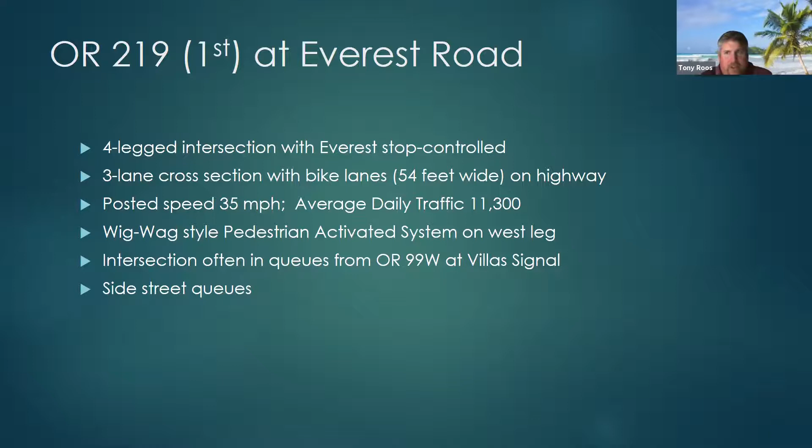I think one of the big issues I have with the intersection is the visibility of the wigwag signs. They often get hidden by all the sign clutter and utility clutter leading up to it. And you really can't see the pedestrian trying to cross there until it's really too late.

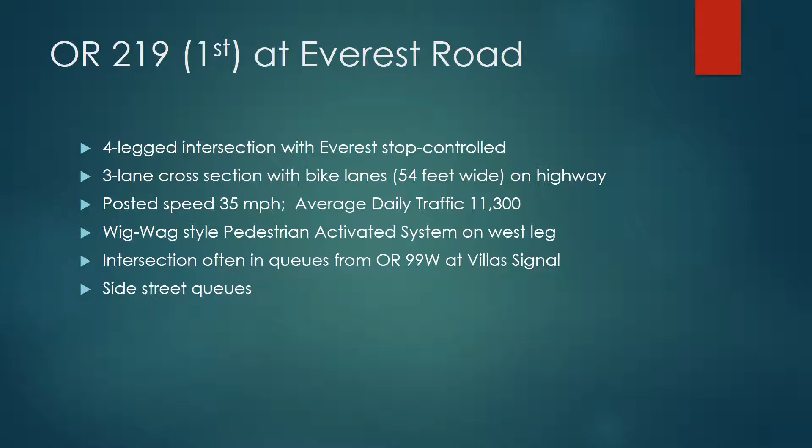Anybody else have anything to add? Okay. Hopefully that's not just a Tony issue.

So, the other thing is where you get lots of complaints about the queues here, because now that 2nd Street is cut off over here, this part of the neighborhood is complaining that they can't ever get out, even though they do have another way out over here. So it's this particular one. We've gotten a little bit of complaints about trying to get over here to the grocery outlet.

So just wanted to put this map up to where this is really the intersection I was trying to focus on per se. I'm going to dig a little bit into the crash history, just to try and figure out what is actually going on here.

So SPIS, which I don't know if you guys are familiar with, is our Safety Priority Indexing System. We run it once a year using the last 3 years worth of crash data. We rank all the segments on the state highway system, and we take a look at the top 10 to 15% to see if there's things we can do.

So this particular section, which is from mile point 20.71 to 20.82 — the 20.71 is actually just south of Villa. So it actually does take that corner where it comes down off of Villa and then through this particular intersection.

So in 2017 it was in the top 5%, meaning only 5% were worse than that. But as you can see, it's actually going down — in our most recent one, 2019, it's dropped down so it's only in the top 15% instead of the top 5.

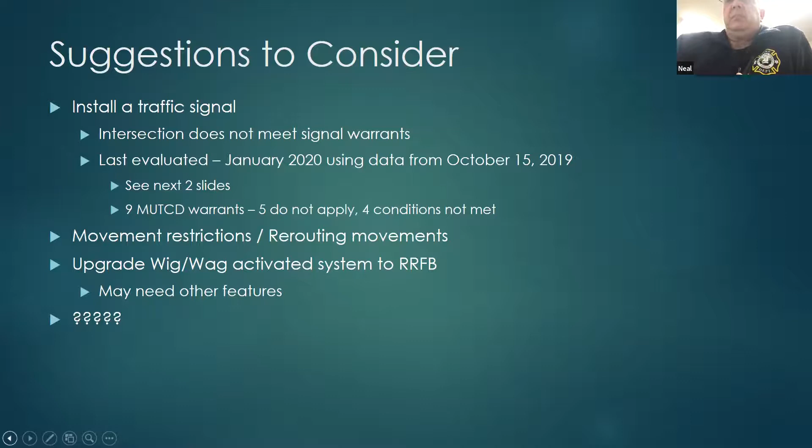We have had other requests for a crossing mid-block between 99 and Villa on 219 as well, for people to access the grocery outlet. But there appears to be a missing sidewalk gap between Villa heading, or from Everest across Villa, about 400 to 500 feet of sidewalk that's missing. Is that on the grocery outlet portion? Yeah, and if that was filled in, maybe a better crossing location would be the west side of the Villa intersection.

Well, it depends, because don't you have a lot of pedestrian traffic coming up Everest that just wants to cross Everest and keep going north? You wouldn't want them going out of direction all the way down to grocery outlet in order to come back. I don't know where they're going - if they're walking from Everest to get up to George Fox, or over to get to Ace Hardware and La Sierra, or the Mexican restaurant. Without actually following pedestrians, it's hard to say where they go, but that whole area between 219 and 99 on Everest - or if they're just trying to get to the Villa signal on the east side of the intersection to continue north on Villa, I don't know.

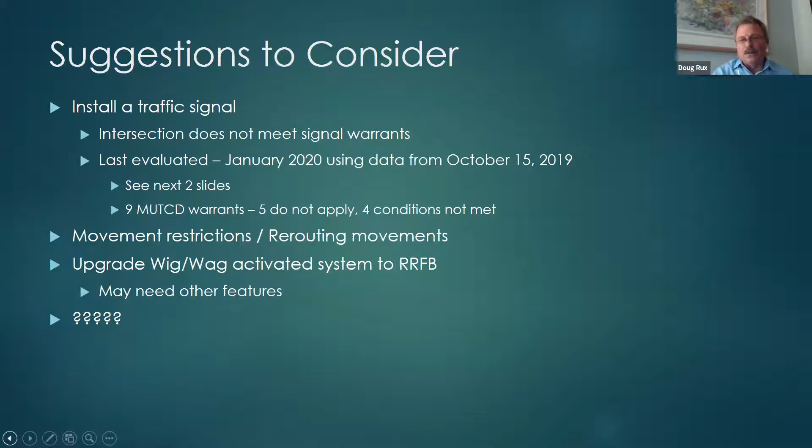So those are some things we can keep looking at, Doug, if you want. It's one of those we consistently hear from the residents who live south of 219 and off of Everest and Church and all of those areas. They're really landlocked - you get to ride out on 219 and go down to Springbrook and around, or use Everest. So we're constantly hearing from residents about safety concerns at the Everest/219 intersection and what can be done. They feel very isolated.

Well, like I said, we can have some more conversations about that, Doug, offline after this. So should we go on to the next intersection? Traffic safety - any other questions on this intersection? Seeing no hands or violent objections, let's go to the next one, Dorothy.

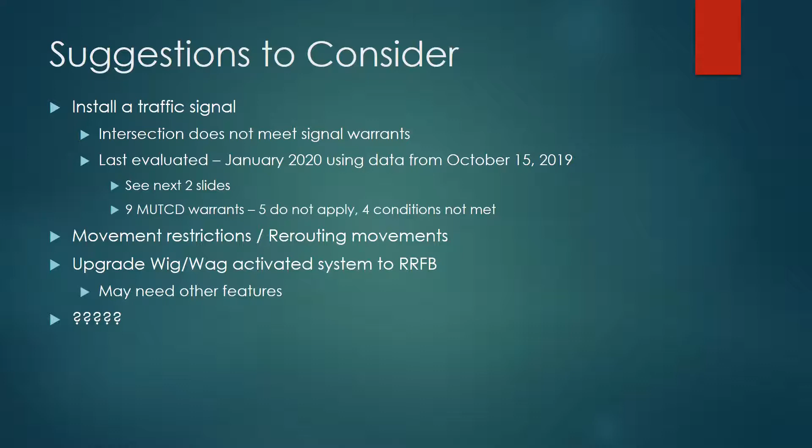That's just the three Andrews working out the audio. We all have the same invite, so they were all Andrews. Okay, got separate invites to figure that out.

Thanks. Okay, so the second intersection to talk about was 219 at Sheridan, that's College, like one block north of 99. It's the four-legged intersection, Sheridan stop controlled. It's got the part-time restriction on the west leg. So for eastbound traffic, that's done with just a sign that says right turn only from 3 to 6 p.m. Monday through Friday.

This particular part of the highway is only a 2-lane cross section. There's no parking, it's only like 24, 25 feet wide. Posted speed of 25. It's got about 7,100 cars.

This one, typically in the afternoon during peak periods, there is the queue from the signal, and it starts building the side street queues. The thing that I thought was really pretty interesting is when I looked at the crash information, 17 of the 18 crashes at Sheridan were that eastbound move.

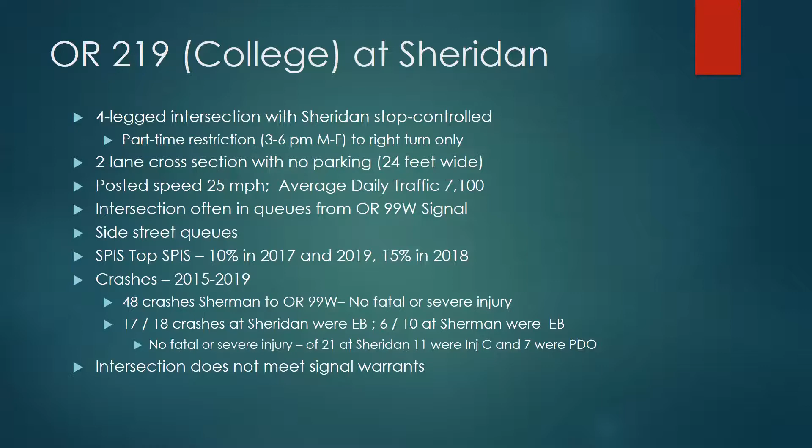The intersection doesn't meet signal warrants. The SPIS, if you take a look and see, it's been in that 10 to 15% the last 3 years. And that's just basically based on the number of crashes, not basically on the severity of the crashes.

So we are talking about this intersection right here.

One thing that I know I've talked with Karin about in the past is maybe doing something to change the enforcement of that movement restriction.

Putting some type of a physical barrier, like a traffic separator, to address the crashes. It would cause traffic to reroute to either down to 99W or up to Sherman, but at least it would get it out of the queues, or at least a majority of the queues. That's probably about the best way I can say for trying to address what the reported crashes are there.

Let's have a little bit of discussion. Am I missing anything that's actually going on there that also needs to be considered?

No, Dorothy, that's what I've heard from people, is that people aren't, basically they aren't following the posted sign there. And obviously enforcement in that location would be challenging. So I think really to address the issue, we're probably going to have to start to look at some kind of physical barriers.

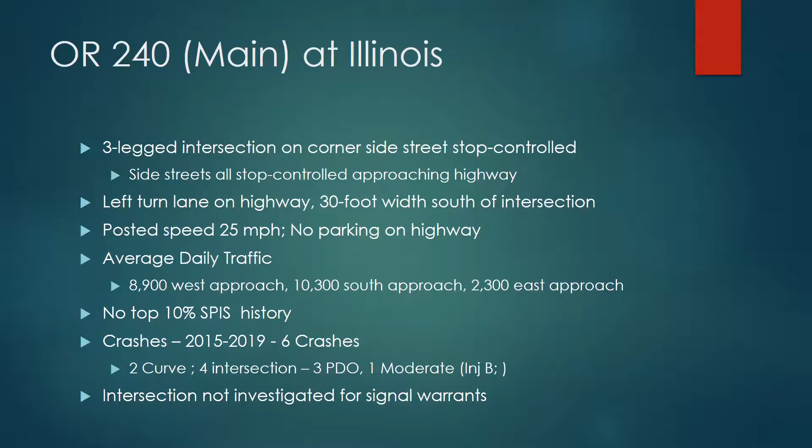In that 5-year period that we looked at crashes, there was a sum total of 6 crashes. 2 of them were directly related to the curve, fixed object running off the road. The other 4 were at the intersection — 3 of them were property damage only, and the one that was a moderate injury actually happened to be a rear end crash. So it's never been investigated for signal warrants just because of how the movements are.

So, yeah, you weren't very specific about what kind of things you wanted me to specifically look at, what you guys are hearing for complaints here. So talk to me, what's going on?

A lot of the complaints are about the backup on Main and Illinois trying to get onto the intersection, with people making very poor decisions entering the highway. Are you talking about this backup here, Tony? Yep. And then the other issue is the pedestrians.

If you look at the pedestrian traveling north on the east side of Main, crossing Illinois, they're completely separated from the roadway when that eyebrow was put in. So somebody turning northbound from Main to Illinois has no stop sign for that movement, and they're not expecting to see a pedestrian crossing right there. There's also a lack of lighting, kids wearing dark clothes near the park just up the road on Main Street.

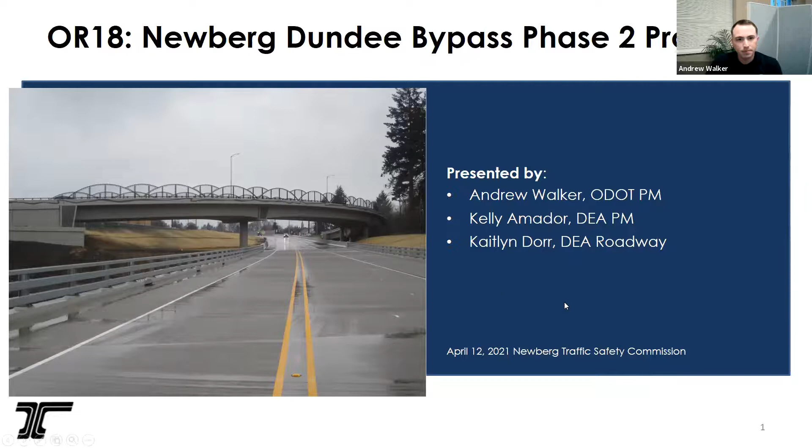You there, Kelly? No audio, we can't hear you, Kelly. Bummer. Okay, Kaitlyn, can we hear you? Hi, can you hear me? Yeah, we can hear you. Okay, well, yay! Just tell me when you want to switch your slides and we'll go through it. Kelly's the project manager for DEA. There we go. So do you want to talk about this slide, Kaitlyn, or do you want me to walk through it until we get to your portion?

You can go ahead and walk through this one and then I can take over. Sure, so this is the full bypass, you can see what that would look like. Currently we have what we call phase 1, which is just south of Dundee, and it connects with something we call the fish hook, over here, and then connects up here to 219. So phase 2 would be this portion right here, and it's going to be similar to phase 1 in that it doesn't build all 4 lanes, it's just going to build 2 — a partial build of the bypass. Then there is some planning going on for phase 3, but that's very far into the future, probably wouldn't even occur in my career.

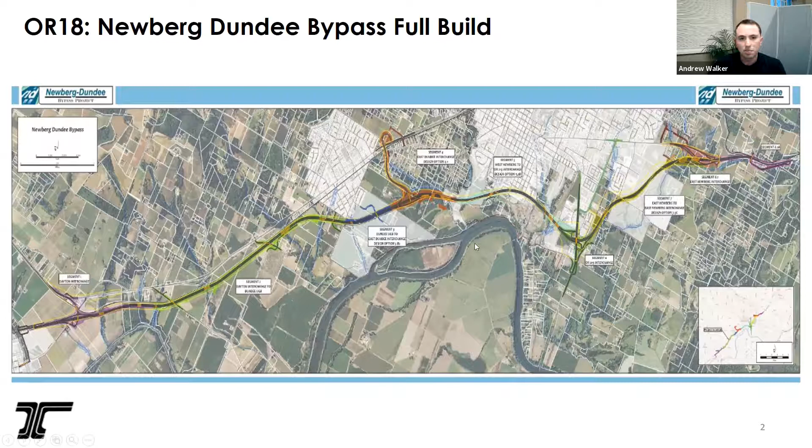Here's a quick overlay of what phase 2 would look like, so you can kind of see that it's a partial build. It doesn't have all 4 lanes included. It has an intersection or interchange here at 219, has a realigning of Wynooski, has a connection up here at 99 and another one over here. Anything you want to add to that, Kaitlyn? No, I think you covered it. All right, it has an overpass here at Fernwood, that's one other area.

All right, so I will hand it off to you here, Kaitlyn. Thanks, Andrew. So these next few slides, we're going to walk through the project starting at the west end at OR 219, and then we're going to go all the way up to OR 99 West. This slide is showing the OR 219 improvements from north of Springbrook to south of Wynooski and Wilsonville. North is to your left, and OR 219 is running from left to right in the upper part of the page. Springbrook is on the left side, and then Wynooski is kind of down in the middle right there.

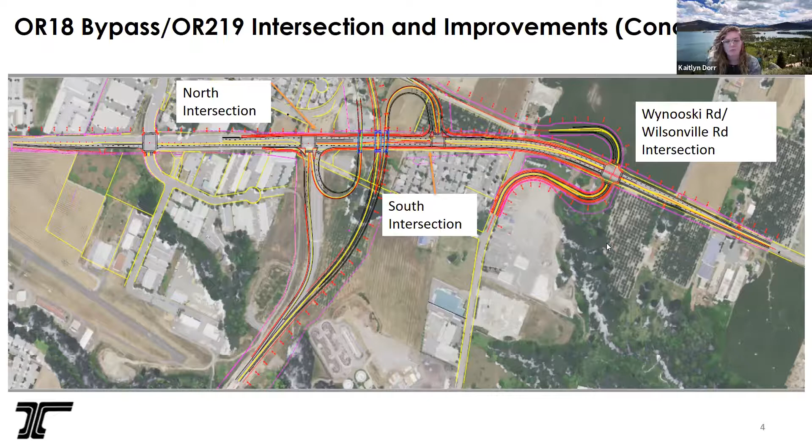The south intersection also has an exit loop ramp and an entrance ramp, just for the opposite direction. So the exit loop ramp is going to be for cars traveling eastbound on the bypass and exiting to OR 219, and then the entrance ramp is going to get onto the eastbound bypass from OR 219. And then you can also see that the Wynooski and Wilsonville Road intersection, Wynooski is realigned to line up with the new Wilsonville Road intersection. The next few slides, we have some zoomed in views of each of those so we can look at that in a little bit more detail.

So this next one is that north intersection. Again, north is going to be up in this picture. OR 219 is going to be running from top to bottom on the screen. The entrance ramp is on the left-hand side on the north portion there, and then the exit loop ramp is going to be directly south of that.

So like I was saying on the last slide, there's going to be sidewalk going down OR 219, shown in the red solid lines on this picture. It's kind of hard to see, but that's on the outside. And then there are pedestrian islands and crosswalks shown on all three legs of the intersection, on the north and south going across OR 219, and on the left-hand side going across the exit loop ramp and the entrance ramp to and from the bypass.

So currently we're showing 2 left turn lanes from OR 219 northbound onto the bypass, and a right turn lane southbound on OR 219 onto the bypass going westbound to Dundee. The exit loop ramp is going to have a left turn lane and 2 right turn lanes to continue southbound on OR 219.

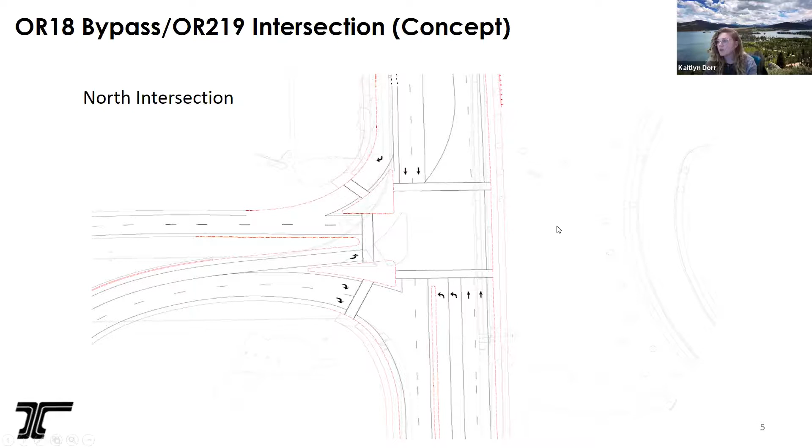And I think we can move on to the next slide.

So the south intersection, the orange line shown on the left-hand side of the screen is the existing sound wall that exists today. Again, north is up, and OR 219 is going from top to bottom of the page. On the right-hand side, they're switched: the exit loop ramp is on the north, and the entrance ramp is directly south of that. The entrance ramp gets onto the bypass going eastbound towards OR 99 West, and the exit loop ramp is for if you're already on the bypass going eastbound and exiting to get off at OR 219.

Similarly, there's a designated left turn lane going southbound on OR 219 to get onto the bypass. A right turn lane is shown on OR 219 northbound, and there are a couple turn lanes to get off onto OR 219 from here as well.

All right, next slide.

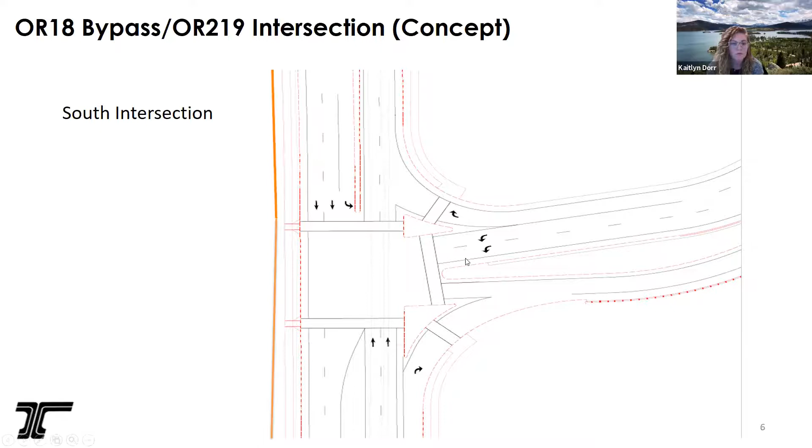So this image is showing the Wynooski Road and Wilsonville Road intersection, and north is still up in this picture, and OR 219 is still going from top to bottom. The realigned Wynooski is on the left-hand side, and the Wilsonville Road connection is shown on the right-hand side. This intersection is going to be signalized, which is a little bit different than what's out there today.

For Wilsonville, we are showing a couple of changes to that intersection leg, separating out the right, through, and left. Again, like Andrew mentioned, this is all pending traffic analysis, so this intersection layout may change. That's what we have shown.

Kaitlyn, this is Dorothy. You also need to say that you cannot guarantee a signal will go in. It will be evaluated for a signal. Yes, thank you, Dorothy.

So I think that's everything I had on that side. We can move on to the next one.

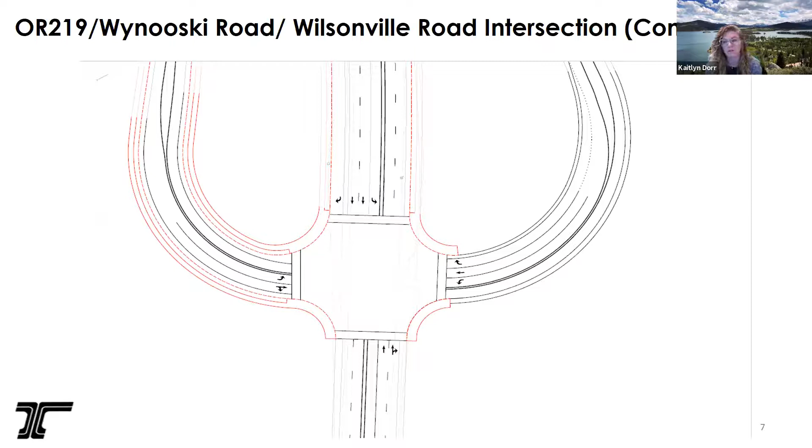So do you mean specifically along 219 or the whole bypass? In general, the whole bypass, but specifically through this intersection, how it ties in with what CPRD is proposing for the riverfront. I might let Kaitlyn talk about this specific area - that's kind of a broad question, maybe we'll save that for the end. As far as this intersection goes, bike and ped is accommodated throughout the entire 219 section. We are showing sidewalks on both sides of OR 219, but the sidewalk limits do stop right on the south side of this intersection, so they don't tie into the CPRD's Parkway plan.

Roger, I might jump in on this. I was just looking at this recently because they applied for an Oregon Community Paths grant to fund some of the path. The alignment I've seen would make the Springbrook intersection the key one, not this one - north of here, where the Springbrook separated path comes in on the south side of Springbrook and 219, there's a wider multi-use path. Cyclists would go there, continue west through the Industrial Parkway, hopefully getting funding to go over Hess Creek and tie into Wynooski. North of this intersection, there's already a wide ramp ODOT built for that alignment. So while we will accommodate bikes and peds here with typical standards, the real connectivity opportunity - with wide ramps that are paths, not sidewalks - is up at Springbrook. Does that sound right to you?

Great, thank you, appreciate the clarification. Any other questions on this intersection or any of the previous ones?

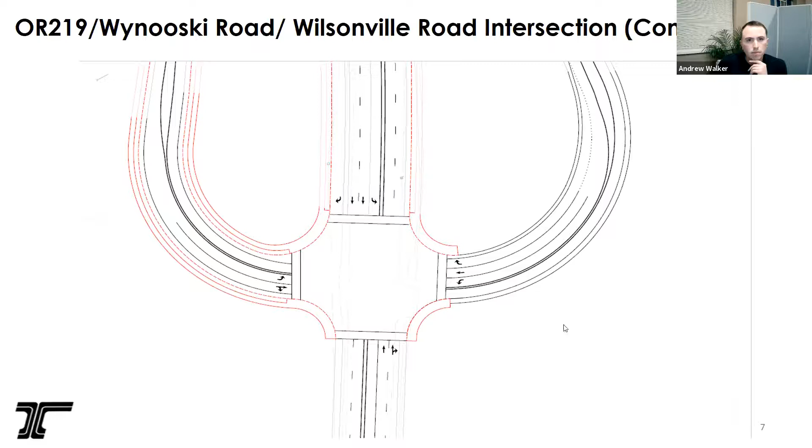Okay, move on to the next one.

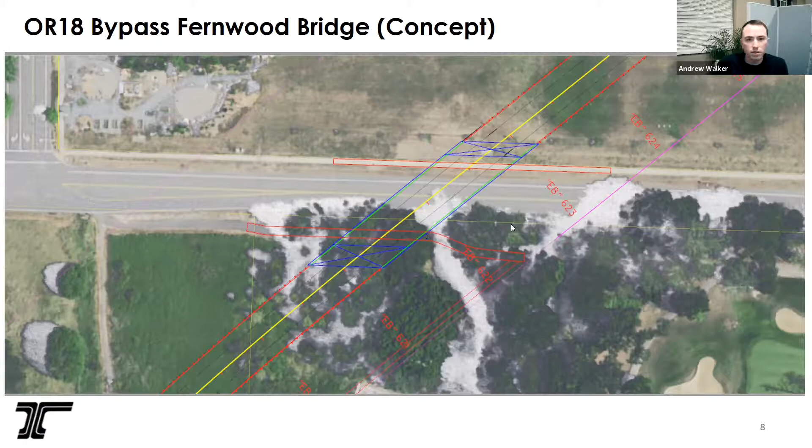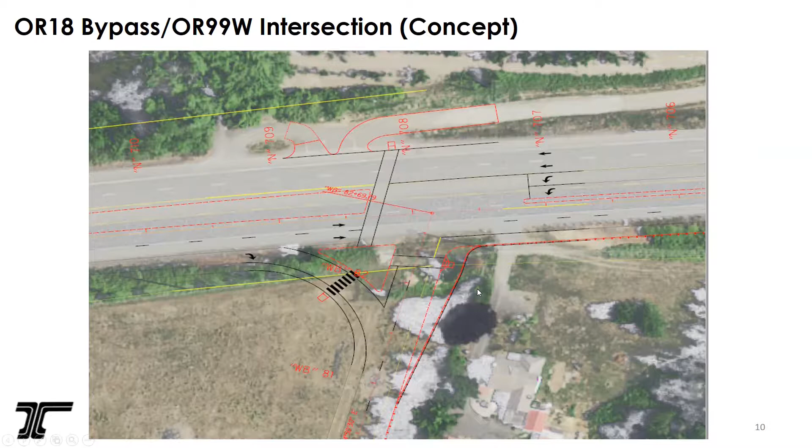Just to be clear, if this were to be zoomed out a little bit, Benjamin is off to the top left of the photo, is that correct? So we're looking right here. Okay, yes, and here's A to Z over here. Thank you, that's helpful.

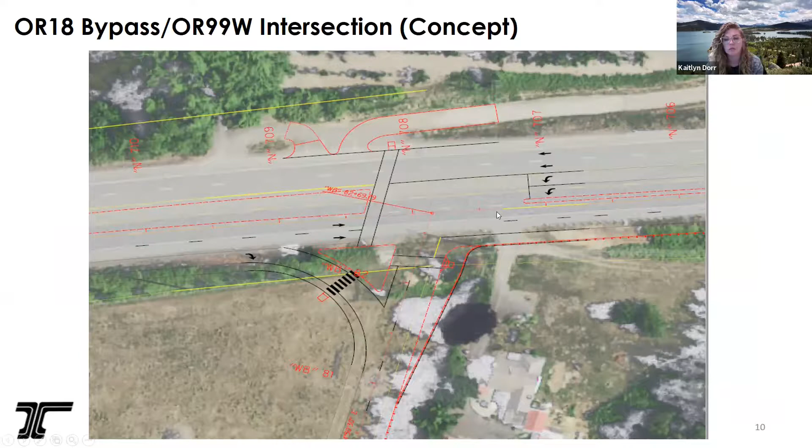That is also another one that we'll have to get approval for. It's not automatic.

Thank you, Kaitlyn. I was going to say, when you've got a double left turn lane and a U-turn on the interior lane, I know in Region 1 when I've dealt with that before, there's been issues. So there's a few, like we said, this is really preliminary concepts, kind of what we're looking at. None of the traffic has been run for this yet in any definitive way, and there are still a couple other layouts we're considering to solve some of these movement issues.

So are we taking into consideration that a fair amount of traffic making that left-hand turn could be stretch limos, people doing wine tours? And will there be enough room for a limousine to make a U-turn at that intersection to head eastbound on 99W after leaving the A to Z winery?

The short answer is yes, and vehicles even longer than that. So okay, great—trucks and long freight vehicles. Yeah, we're looking at what type of solutions we have for those vehicles.

Yeah, I think part of the concern for the city, if those U-turns don't work, is you're pushing more traffic down towards Providence and Crestview Drive. Where do they turn around down there, and what kind of negative impacts does that have? Figuring out how to get vehicles turned around here safely is definitely one of the design challenges we're working through. We identified that particular issue as well, but I appreciate the comment.

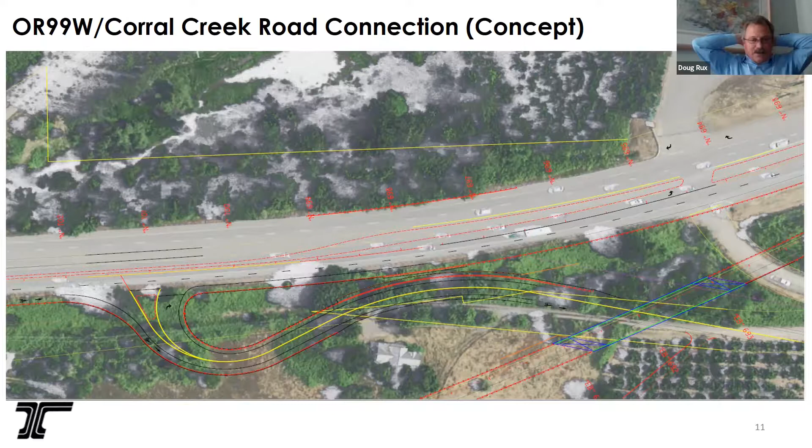The other thing, we were talking about signage. Let's not make the mistake we made with phase one and forget that in the signage you've got to direct people to downtown Newberg. It's not all about the bypass, because that came up in phase one at Springbrook, there was nothing that said downtown Newberg, it was all about Springbrook. So that's something Karin and I will be watching, because I've been beat up on it for years now. Well, I don't want you to get beat up. So yeah, we can definitely keep an eye on that and see what we can do as far as that goes.

Any other questions, comments on the concept thus far?

Okay, all right. And this is the last slide that we have for the project.

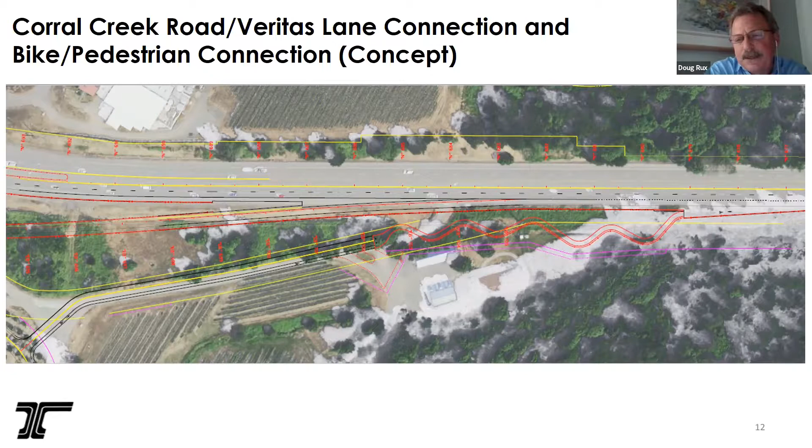So this is Doug again. So the project doesn't go up far enough to get to Quarry Road at 219 in the bridge. It was going to go across 99, but that's not part of this. Is Quarry Road up to on the right-hand side of the page in this view?

Yeah, if you kept going northbound on 99, just as you get up towards the end of the slide or the picture, Quarry Road comes in there and ties back in. I just know in the FEIS it had a new bridge of Quarry Road connecting back into 99, but I'm just seeking clarification, the project doesn't go that far to the northeast. This phase does not, but I'm aware of that bridge you're talking about. And in the final build of this, that would be included, but our phase doesn't include that.

Does this connection onto 99 provide adequate flow for trucks and things? I think that was a concern about this bypass, that there would be traffic for trucks to make it easy to get up that hill. Yeah, this will significantly improve truck traffic. This grade will be far more gradual and easy for trucks to traverse, as opposed to the current Rex Hill grade that's pretty steep, where folks come screaming down and crawling up.

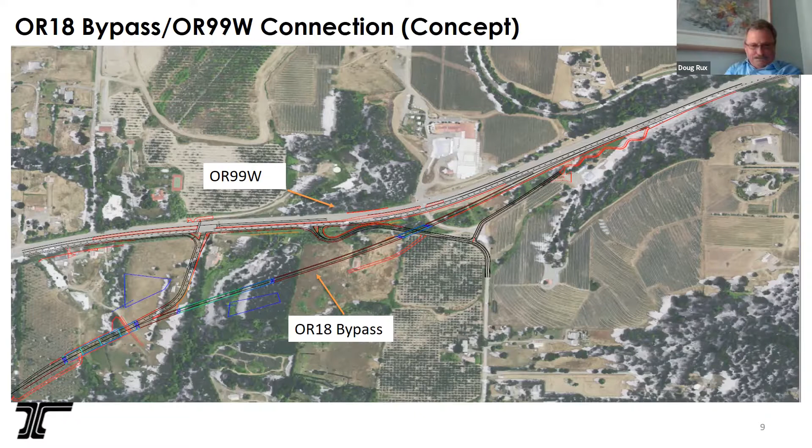I was having trouble visualizing how much of that golf course is going to get easier, like the number 2 hole getting shortened up a bit. I don't know if you know Don Clemens, but he's part of CPRD, and we've talked about that, and we think it'll actually improve. Right now it's a par 3, and I think they're planning on making it a 5. My understanding is it's going to be better, and we're going to play over the bypass. It's going to take a turn, but yeah.

Fair enough. First thing I'll do when this gets built and that golf course is adjusted, I'll do some rounds out there. Well, Andrew, call me, we'll go out and play. We can do a before round and an after round, and debate which version was better.

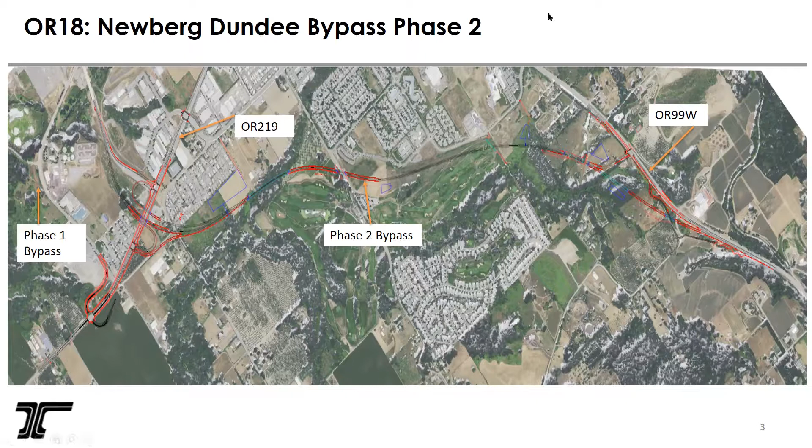I don't think so, I don't think we have any new projects to tell you guys about. Elliott Road is still moving forward. We're still looking at paving on - this might be an update - North Street, Franklin Street, Willamette, and 6th Street as part of the transportation utility fee money.

Safe Routes to School will be moving forward. We do have a signed grant for that, so we're putting together the PE and that type of thing to get that under construction.

I'm trying to think of anything else for this group at this point. The budget committee meetings start next week, so we'll know more about where we're going to land budget-wise.

The next sidewalk project will probably be installing sidewalks around Scott Leavitt Park, since there are no sidewalks there. Again, kind of building on Memorial Park, building sidewalks around the park seems to make sense to get people there and around. So that'll be the next city project on that piece.

Other than that, I don't think I have anything else project-wise, unless anybody has any questions.

Okay, thank you. We do have some old business, and with the committee's approval, I think we'll continue those as old business to our July meeting.